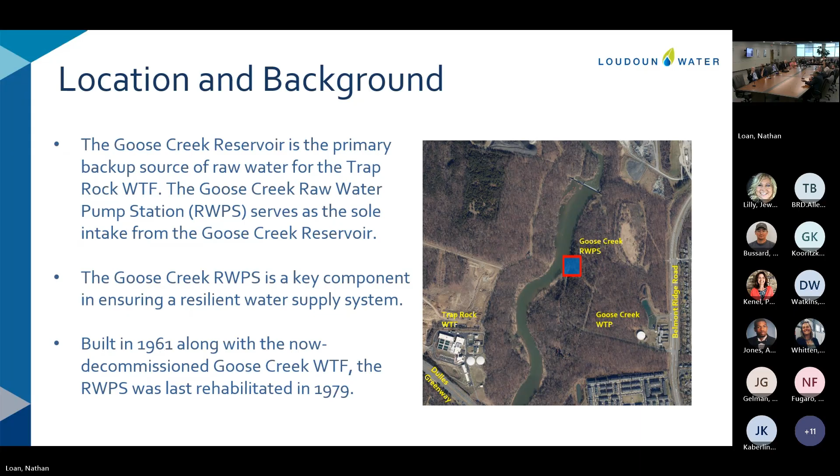Next, I want to talk a little bit about what's going on at this site. A couple of recent condition assessments performed at this site have indicated that there are several components that have aged and exceeded their service life. There are several components that do not meet current code, and a combination of these factors presents operation and maintenance challenges from time to time, primarily because it is just so old.

While the future of this pump station has been a topic of discussion for a couple of years now, last year we had a situation where during a routine test, one of the MCCs, the switch gear, failed. That underscored the risk of a system failure here and the need to quickly move with an alternatives study to decide what we want to do with this facility.

Just as a side note, that particular incident was a maintenance issue. We've already ordered an MCC and it's being addressed through a separate project. So this task order here is more about the future of the station and the alternatives study.

Also, as demand grows, Loudoun Water's reliance on water produced at Trap continues to grow. It is essential that we maintain these backup key systems that provide backup to Trap, functional, to ensure the level of service we desire and the level of operational resiliency in our system that we desire for the long term.

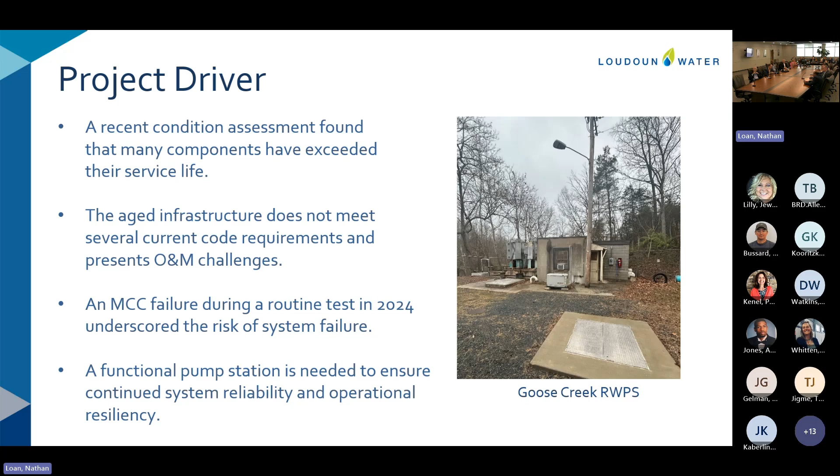So with this study, the main goal is to evaluate the existing raw water pump station and see whether it's salvageable - can we upgrade it to bring it to current standard and keep it going? That's the majority of the effort that will be involved in this task order.

But along with that, we're also looking at some other options: perhaps a new pump station generally in that same area; another would be a new pump station on the other side of the creek, closer to Trap Rock; and then another would be a scenario where we build a pump station near the reservoir, so that we do not rely on the dam and impounding in that area, and can pump directly from the Beaverdam Reservoir. So these are the four scenarios we aim to look at with this study.

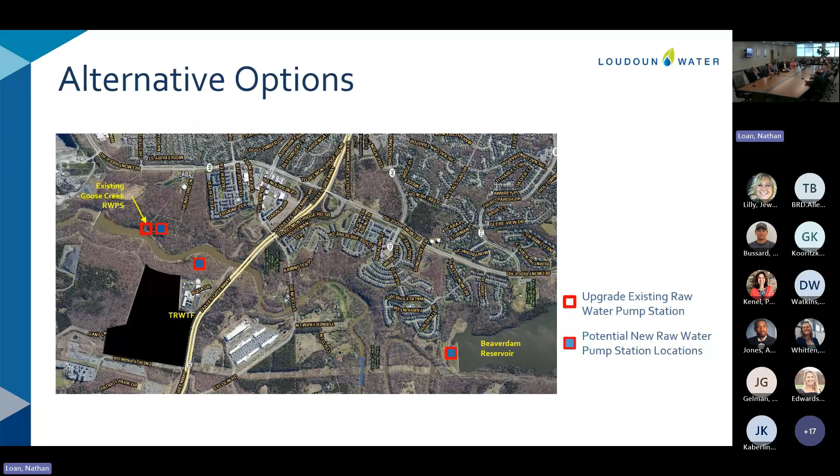For this task order, some of the key activities involve project management. The consultant will review existing documents. There's a lot of in-person physical assessment of the site, condition assessment of the site and its components. The consultants will identify risks and challenges, collect operation and maintenance feedback, and also evaluate code compliance.

Utilizing this information, the consultant will evaluate the 4 alternatives outlined before. They will prepare conceptual layouts for all 4 options, as well as develop a pretty thorough AACE Class 4 cost estimate for each option. All this information will be packaged in a technical memorandum for Loudoun Water's review, to help with making a decision on the future of this facility.

For this task order, we selected Hazen and Sawyer. Hazen is one of our environmental BOA consultants, a nationally recognized firm that's pretty experienced in conducting condition assessments of infrastructure like this, and planning and designing facilities similar to this station.

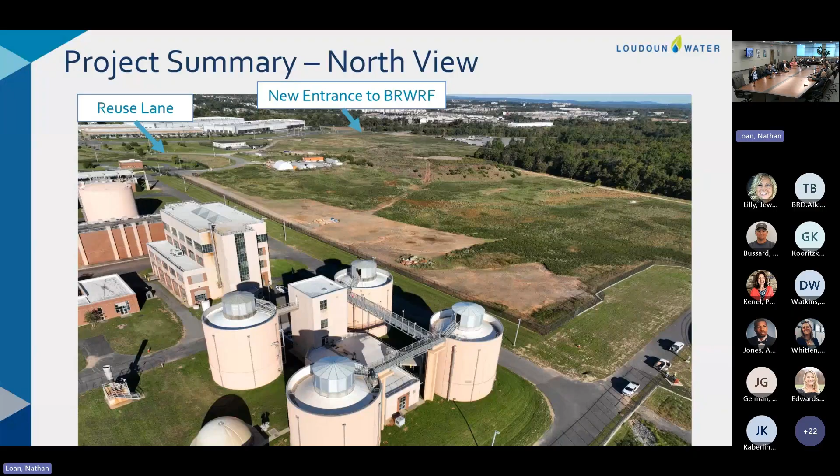We've got our initial entrance here, an existing entrance that the contractor will use for the first 90 days of construction. Then there's a new entrance that will be built as part of the project, which will cover the last 9 months or so of construction.

There's a couple of other elements I want to call out. We've got the contractor's laydown area right in this area, and we've also got Dominion's laydown area denoted, for a project Dominion will start next year, the Aspen to Golden project.

And then also we've got the north stockpile here — this represents the large area of material that will be spread and graded across the site to achieve the right grades in advance of the vertical projects. So there's a lot of earthwork, excavation, and moving of material associated with the project; that's the bulk of it. There's also a little bit of tree clearing, shown right there, associated with this project. Any questions so far just on the scope of the site work project?

Entrance is off of the parkway, to the north. If you come down Loudoun County Parkway from the north, oftentimes there's a vehicle sitting there with the curb apron, and that entrance will become the permanent entrance. We'll have this done before Dominion starts their power line construction.

It will be mostly done, but there will be a little bit of grading overlap, but it shouldn't be an issue, we'll manage that. Dominion's not always fast in getting started.

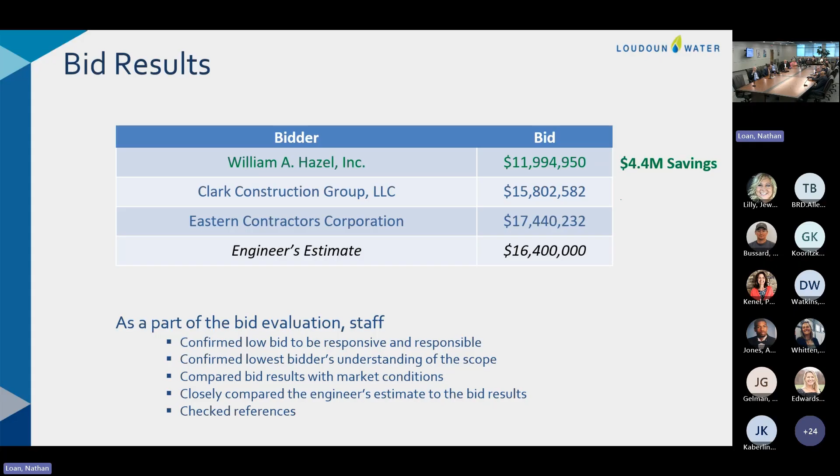I think the way you folks are doing it in phases is really good. Gives you a chance to back off if something happens, take little breaks between.

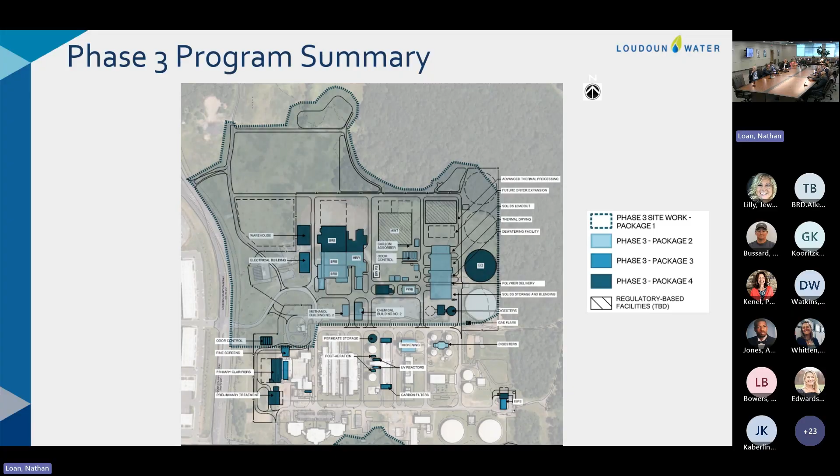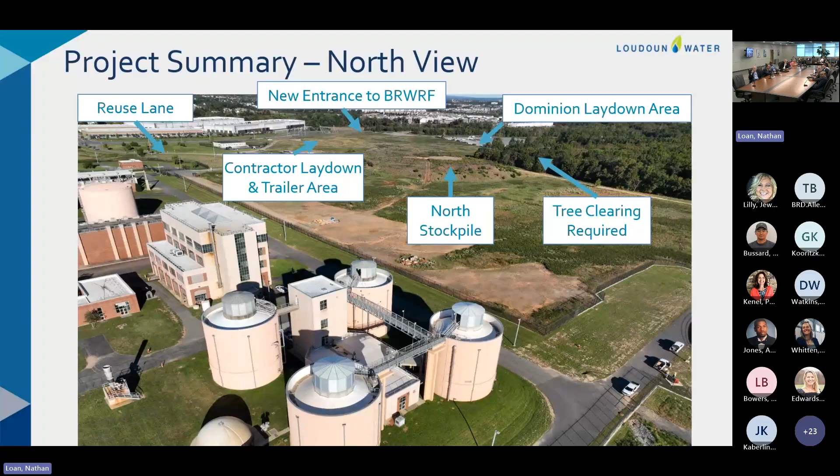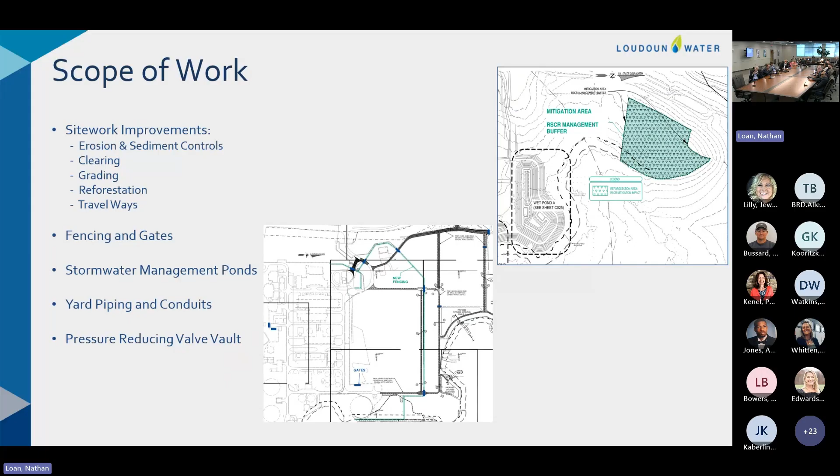And then I'll get into the goals for construction administration. Why are we asking for construction administration here? The purpose will be to support the Loudoun Water PM through the administration of construction. Definitely important on this project is providing specialty inspection and testing services.

A lot of that will be soil compaction testing because of the large acreage of regrading and moving soil. Also, CA services will include review of submittals and RFCs to ensure that we have good construction quality and compliance with the contract documents. We will be leveraging the design consultant's experience with that continuity through construction, providing CA services.

Design consultant is Hazen. And then also we will reduce Loudoun Water's liability or risk of exposure to things like delays, claims, issues with contractor performance that we could encounter, but we don't anticipate. So these are some of the reasons and goals of the CA services for this project here.

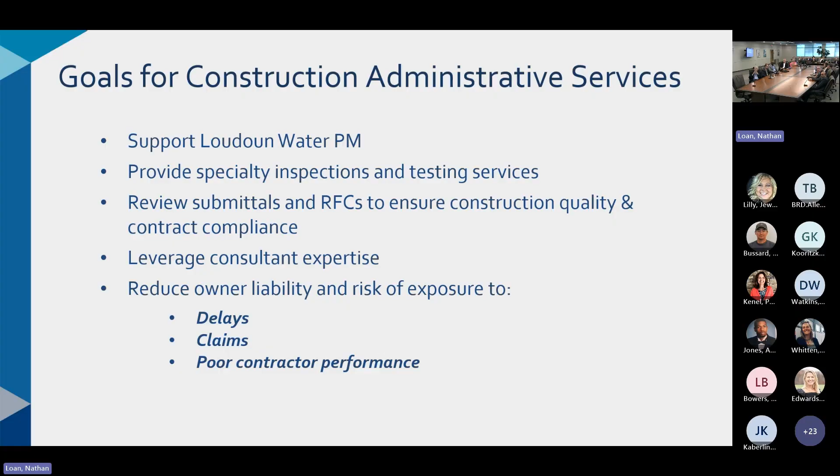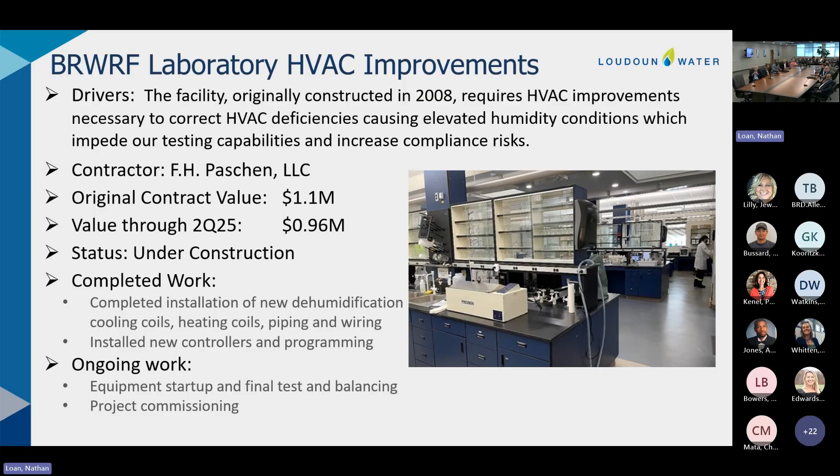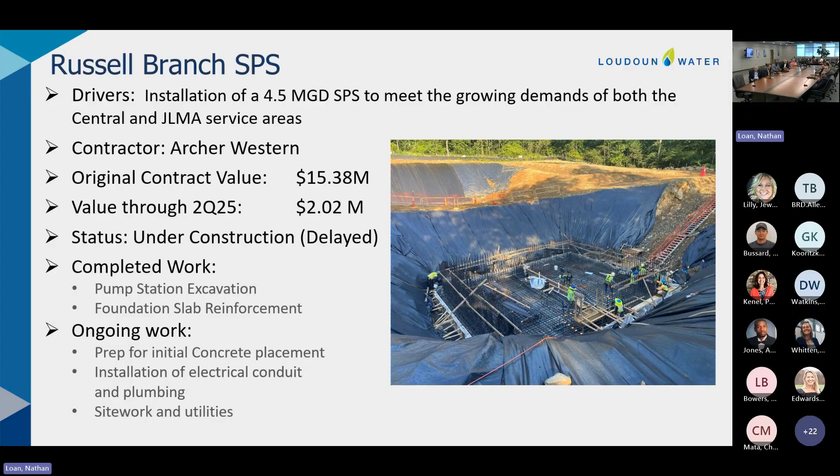So far, no major issues other than that 1 or 2 month delay. I think we're up to close to 2 months of delay in the overall project that we're tracking right now. We're working with the contractor to develop a recovery schedule to see if we can get back on track and mitigate the current delays, and hopefully achieve substantial completion by the contractual date. But so far, we have completed excavation. Slab has been constructed and concrete has been placed right after the cutoff for the reporting period for the second quarter. So progress has picked up, but I should report on the delay here so we can track how we do moving forward with our recovery measures.

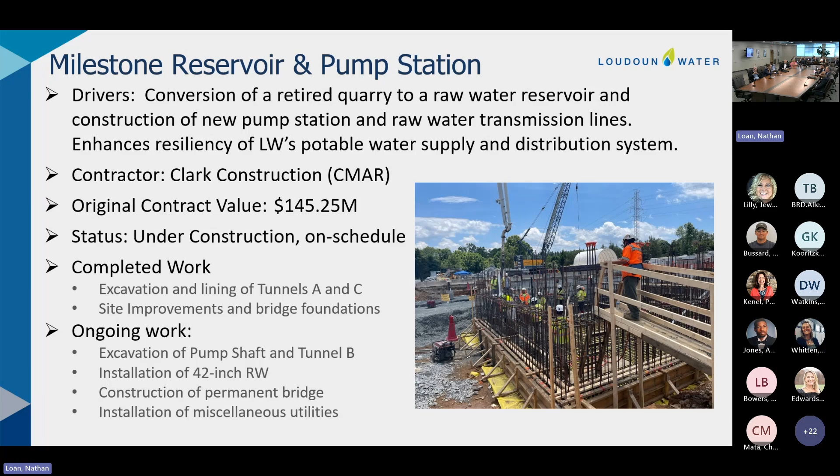Mr. Bonfils, did you have a question? No, I'm just looking ahead at some of the nice pictures. And smiling.

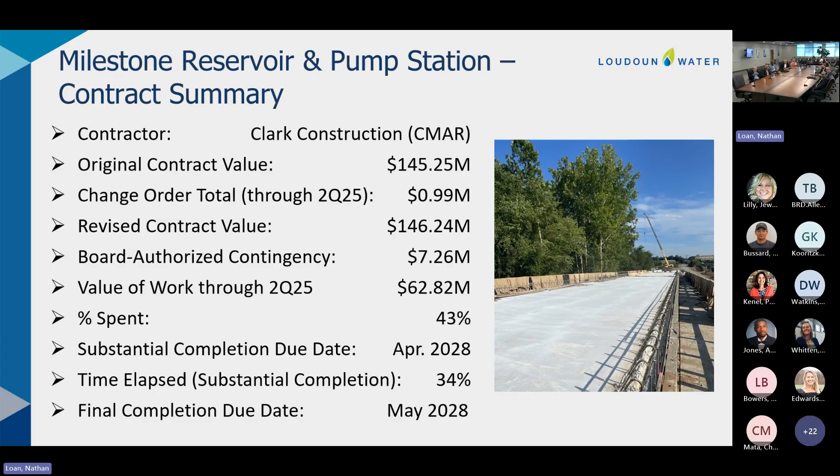The financial figures and overall project contract summary look good as well. We are just under $1 million in change orders through the second quarter. We are looking at 43% spent on 34% of time elapsed, which reflects that slight advantage we have on the currently projected schedule. The final completion due date is still holding strong at May of 2028 for this project. So far, no major issues to report in terms of communication, coordination, disputes, change orders, or anything like that. So we're happy about that as well.

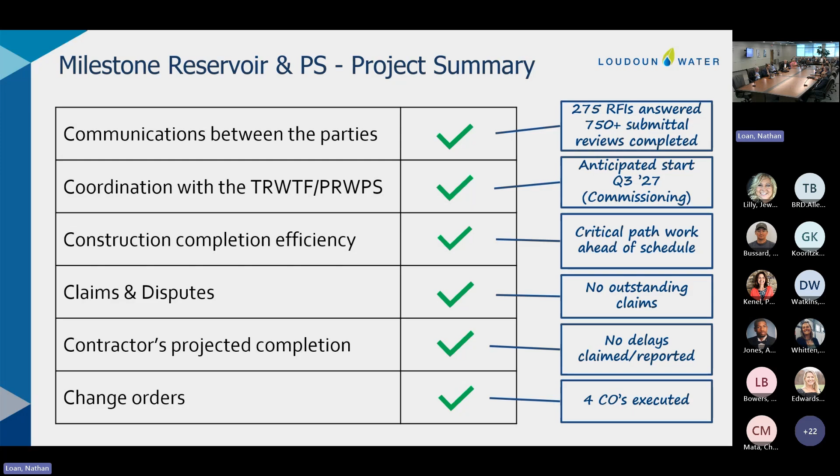And with that, I will kick it over to Rick if there are no questions on Milestone. That's my one graphic for that, my favorite picture. Yeah, well, there you go. I couldn't help myself, but we'll come up with something a little fresher for the next one. I like that one though.

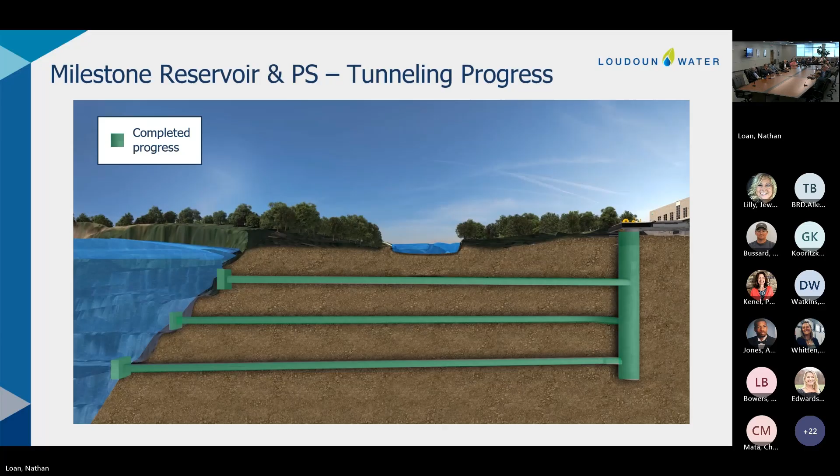Any questions on the Broad Run project? Which are done now - yeah, this was as of June 30th, so there were just a handful of items left to complete, and the contractor got those done in the first part of July. So July 25th final completion, and we're processing the closeout on this project.

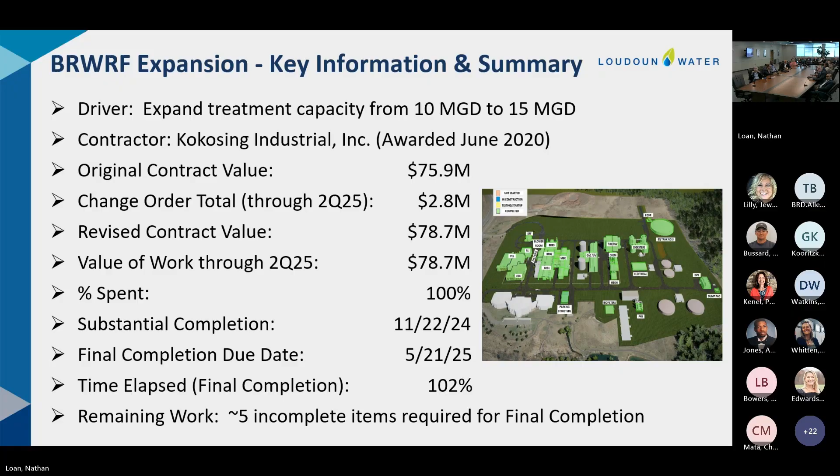Okay, so this brings us to our three lists here. At the end of the presentation we've got our active construction projects. We had 8 active in the second quarter, or through the second quarter. Any questions on any of these time numbers, which are on the left, or time statistics, or contract price statistics on the right? Any questions?

The last one on the bottom, the generator project, any update on that? Work activity has just begun on that facility to install the new generator, and things are progressing well on that one. I'll provide a snapshot for the next quarterly report. I'm always curious about that one because it's an important resiliency item.

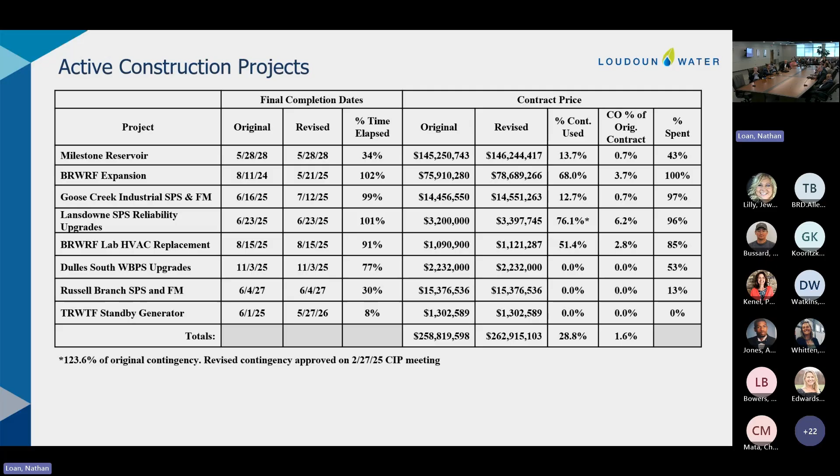We had one completed project for the second quarter of this year, Reservoir Park. This one's a similar story to the Broad Run project in that it was completed, but we couldn't quite hit final completion, full closeout, in the second quarter, so it slipped a little bit due to punch list items and administrative closeout requirements, including permitting.

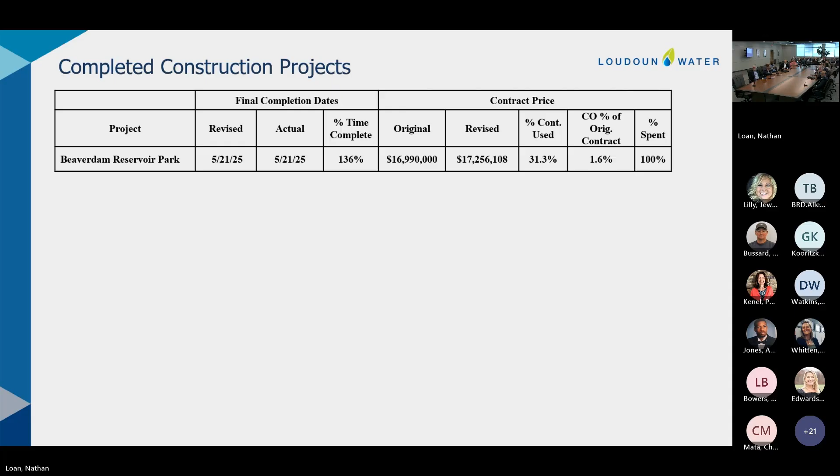Okay, and then we've got our look ahead with our upcoming projects there. You'll see the package one project is number one on the list, and that's going to start construction in October, as I mentioned. And then there are several other projects that should start construction in the next six months or so.

Colonial is a... street name. That's just the street name. Oh, it's just the street name. Yeah, not gas - not a gas pipeline. No wonder, Colonial Park. Yeah. West Beech, Concord, and Colonial.

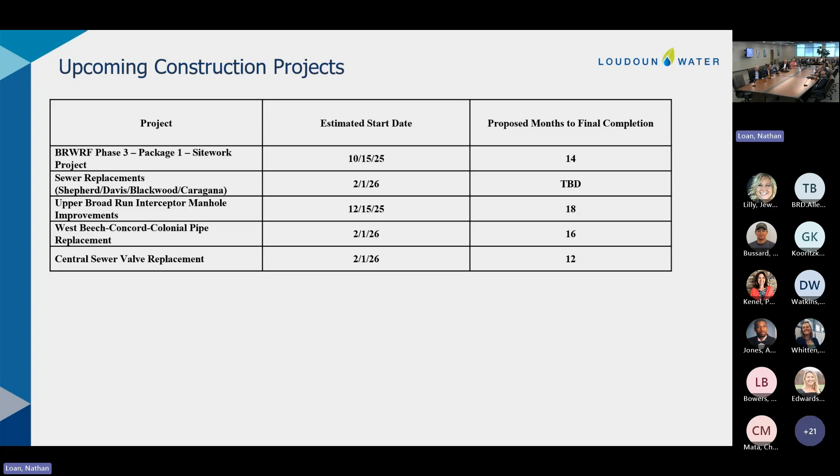Any questions here on the upcoming projects, or just overall? I'm very sensitive about Colonial Pipeline because when I was at Fairfax, I was in court with them. So when I see Colonial, it triggers you - it triggered a bad memory.

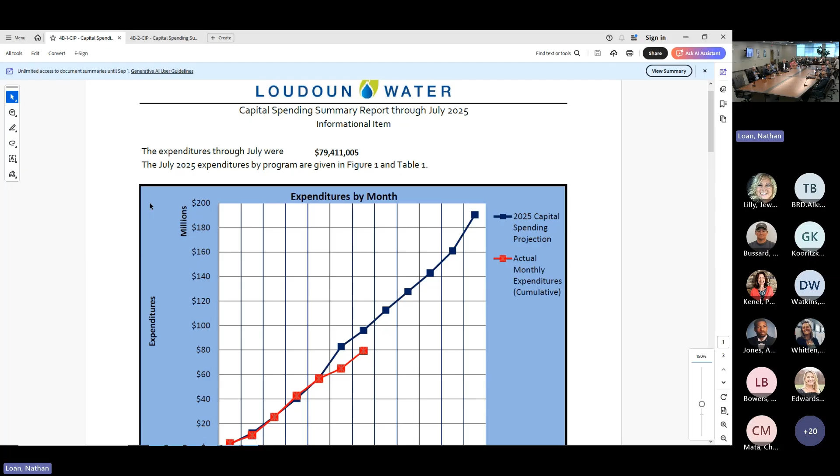I think this is the July report. So if you're following along in board docs or diligent community, as it's called now, I've skipped over item number 1 and just jumped to item number 2. Item number 1 just showed the spending through June, and item number 2 shows it through July, which of course includes the June spending as well. So I just want to mention that for the first half of the year, spending through May was really, really right on target.

And then you see in June, there's a deviation between the actual and the projected. And then if you look from June to July and just look at the slope of the lines, the projected and the actual, we're back on target again.

So I'll get into the numbers a little bit and talk about that drop in June and what we attribute that to. But before I do that, I thought I would introduce Mike Beardsley. Mike doesn't get much of an opportunity to speak in front of the CIP committee, and he's just going to share a really good story about an IT project that you're all familiar with, that was hit on budget and on time in the first half of the year. So, Mr. Mike?

Thanks, Tom. Tom just stole my thunder, but that was the gist of it.

I think the performance in the early part of the year of being right on that slope is due to the S/4HANA project. But anyway, I'll describe a little bit more about that project, which I think you're all familiar with. So just to rewind, the board approved the S/4HANA project upgrade back in April 11th of 2024.

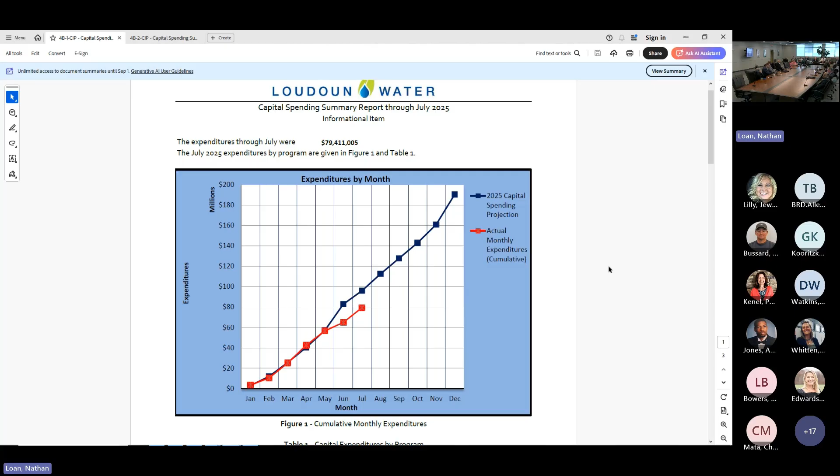Well, thanks to all the staff. I will just say that what we've built in our technology environment, and this is true in other areas in the organization as well, is the envy of our peers. I just met with one of my peers yesterday, and they were doing what we were doing three years ago, and they're still doing it. They haven't been able to get over the hump and actually implement S/4HANA, even though they have the same drivers that we do. They just can't get there. So that's kind of a typical story for us. This continues the first-class effort of this organization. It's amazing.

Well, good. Well, thank you, Mike. As Mike mentioned, there's a lot of great stories like that, I'm sure.

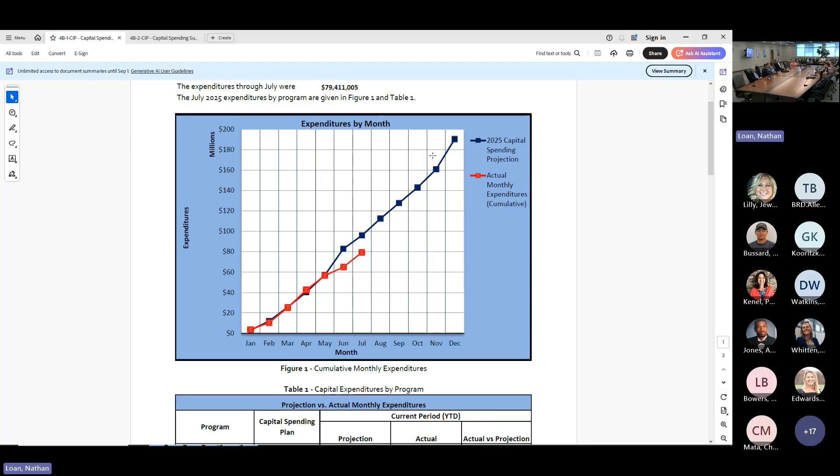Just looking though back at the numbers, if we go to July, we see that the actual spending was around $79 million with a forecast of 96 million. And really the delta between the actual and the forecast can be attributed to two categories. One, the Broad Run project that you just approved was a little bit delayed in the bidding, so there was a little bit of lag. It had intended to start a little earlier, so it's a little bit behind in its actuals compared to where it was projected.

But most of that delta of about $17 to 18 million is actually in reimbursements. And when we say reimbursements in the language of the CIP, what we mean is Loudoun Water paying out money to developers who have been building infrastructure in partnership with us. So we try to do the best we can as we put together the CIP projections and the CIP budget to work with the developers, and our staff does a great job of doing that. They try to project when those developers are going to request, when they're going to complete their work and then request that we reimburse them for that.

And there's always a large challenge with that. We're trying to figure out when we're going to pay out money, and we're probably third or fourth party to that, because you have a contractor that's doing the work on behalf of a developer and we're communicating with the developer. So there's so many different variables that can affect that.

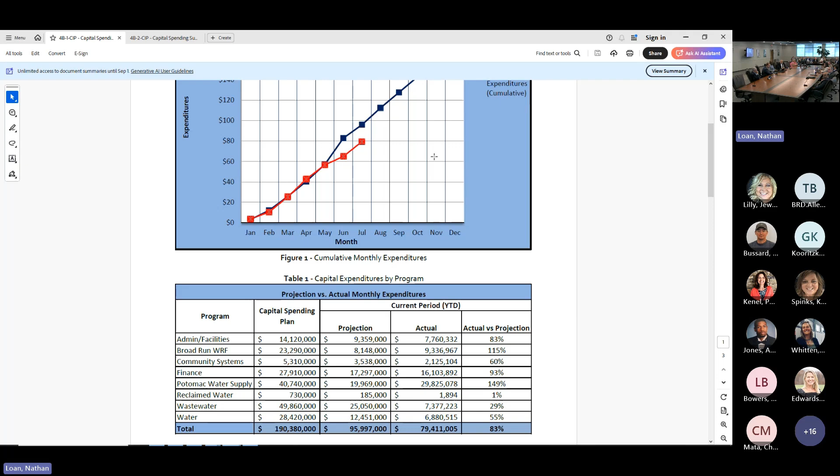That's really what the bulk of that delta is. We had projected that some reimbursements would be requested in the May-June timeframe, and they just haven't materialized yet. We do think that they will come through. It was just the timing, not so much the magnitude of them. So that's really where the difference is for the first half of the year.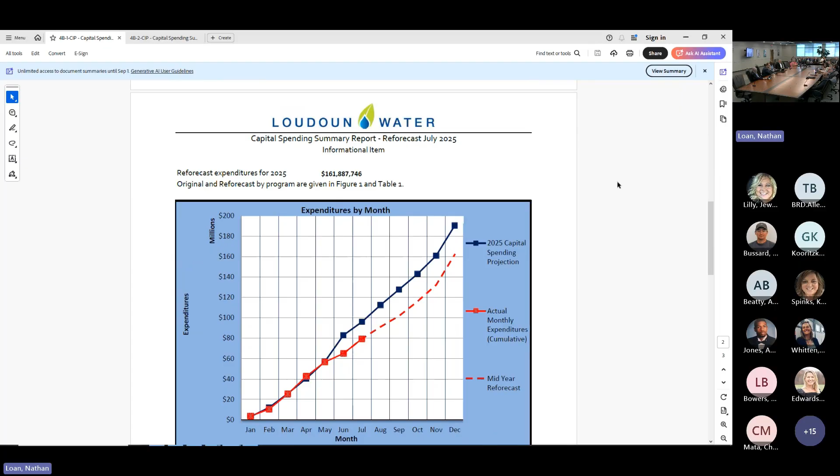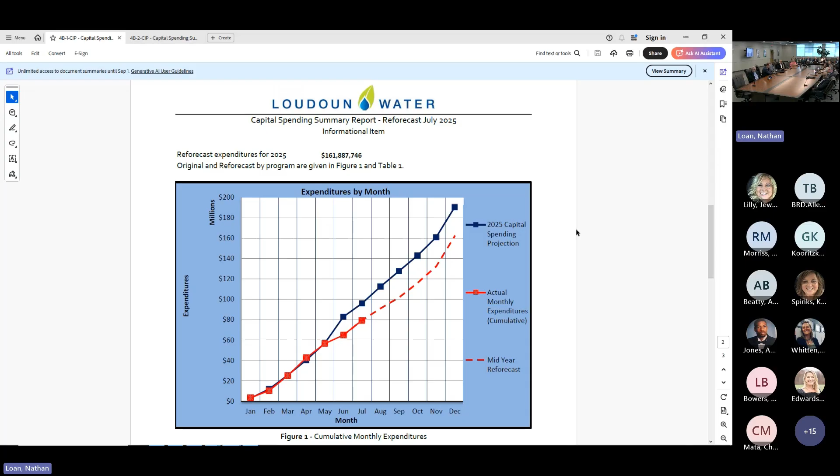Switching over now to the reforecast for the second half and end of the year, the original budget for 2025 approved by the board was 190 million, and our reforecast is that number will be about 162 million. It'll be about 85%, which is pretty much on target. I went back and averaged over the last 5 years, and our reforecast has averaged about 84% of whatever the original approved budget was. So we're following that similar trend.

There is an included variance report, which I'll bring up here on the screen. This is what we typically include with the reforecast. So the 190 million down to 161 - that's a delta of about 28 million and about 15% of the original budget. You can see that we've given some categories to that.

The bulk of that is in that first item, projects that are either behind schedule or delayed. Most of the projects that we have control over, we're on target with those. The bulk of that spending is really just trying to forecast when these reimbursements will be paid out to the developers. So when we look at this 162 rather than the 190, most of that delta is in reimbursements to developers, and a lot of it has to do with the JLMA area.

We'll pay those out, but we're not quite exactly sure of the timing of them. Maybe some of those will come due later this year. If not, we would certainly expect that they will be reforecasted into next year's CIP.

The last thing I'll leave you with before asking if you have any questions is, I think with some of the first half of the year, there have been some typical delays, maybe some rescheduling. We saw even that Sam was talking about the accelerations in Milestone Reservoir, a little bit of the delays on Broad Run, on the Russell Branch Pump Station. But they're all pretty typical, pretty minor in the overall CIP when you're looking at $190 million.